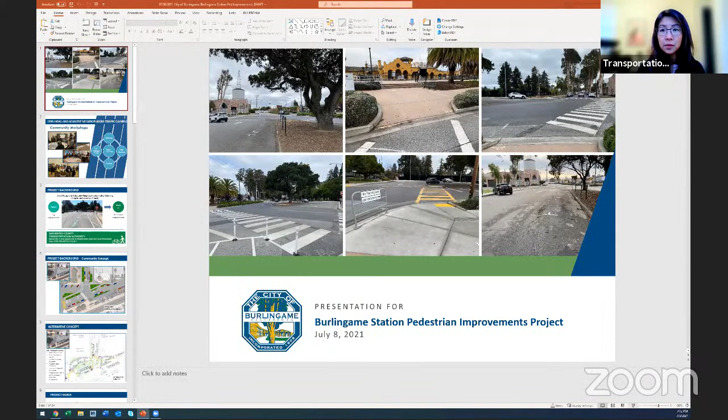Good evening, Commissioners. Thank you for the opportunity for us to provide you with an update on the Burlingame Station Pedestrian Improvements Project. With me this evening to present tonight's update are consultants Michael Fisher and Stephen Tougmasian from CSG, an engineering firm helping with the design phase of this project.

The intent of tonight's presentation is to obtain feedback from TSPC on the proposed design. While I'll briefly go over the project background, Michael will discuss in more detail the proposed design. The Burlingame Station Pedestrian Improvement Project is located at the intersection of Burlingame Avenue and East Lane, adjacent to the east side of the Burlingame Caltrain station next to Washington Park and the tennis courts. Next slide.

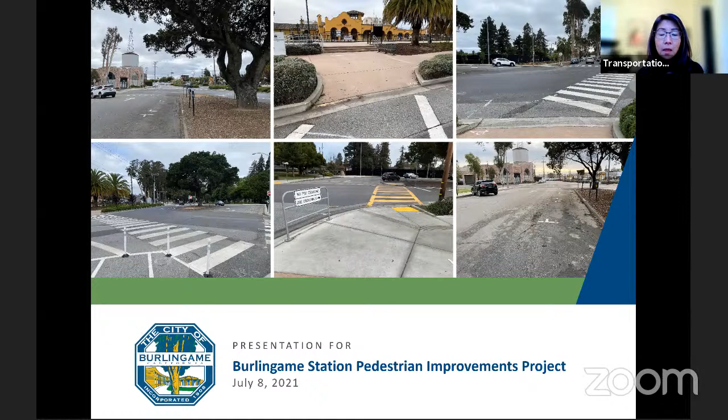Starting in 2018, staff conducted a series of community workshops and online surveys with residents from the Lyon-Hoag and adjacent neighborhoods to discuss concerns of speeding, cut-through traffic, visibility, and parking in the area, and to develop recommendations for improvement to address these concerns. Through this process, the intersection of Burlingame Avenue and East Lane was identified as one of the locations of concern. The results of this extensive community involvement was the development of the Lyon-Hoag and adjacent neighborhood traffic calming studies and recommendations report. Next slide.

The report categorized improvements based on their complexity and deliverability into 3 phases. As part of the recently completed phase 1 of improvements, the city installed quick build trial features, such as the temporary curb extension at this location, aimed to reduce the crossing distance of the long crosswalk and to better align vehicle path of travel. Construction of permanent treatments was planned for phase 3.

However, thanks to the San Mateo County Transportation Authority Measure A and W pedestrian and bicycle program, the city was approved to receive $600,000 of grant funding, allowing us to advance the implementation of permanent improvements sooner than planned. Next slide.

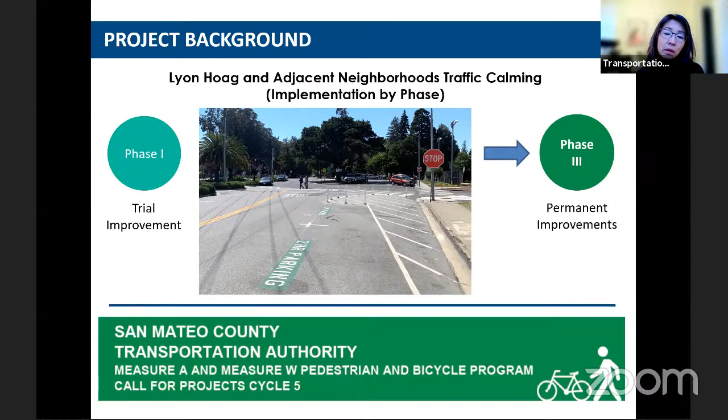With this grant opportunity, staff and CSG began reviewing the preliminary concept that was developed as part of the traffic calming study report. Some of the key takeaways from this concept include the goal of better aligning the roadway, reducing crossing distance, improving visibility, adding more sidewalks, and providing traffic calming in the area.

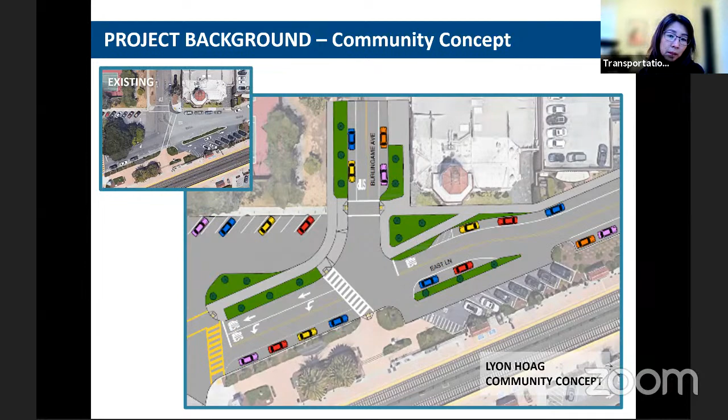Next slide, please. In addition, staff received an alternative concept from community members. Key takeaway goals from this concept include preservation of the heritage oak tree and addition of stormwater runoff treatment. Similar to the Lyon-Hoag community concept, it also aimed to reduce crossing distance, improve visibility, and slow down traffic while creating a charming intersection.

Ultimately, staff and the design consultant felt that this alternative concept creates additional conflict points between pedestrians and vehicles, and that the one-way loop will have a learning curve for residents, as new users can often be confused about where a vehicle is supposed to travel. Additionally, funneling traffic through an area traditionally used as a parking lot may not be ideal. While this concept aims to square up the intersection, we felt that the approaches still remain pretty spread out.

Next slide. So keeping in mind the key takeaway goals from both concepts: addressing community concerns, enhancing pedestrian accessibility, creating traffic calming, preserving the heritage oak tree, and incorporating green infrastructure, staff and CSG have developed a proposed design, which now I will let Mr. Michael Fisher from CSG present.

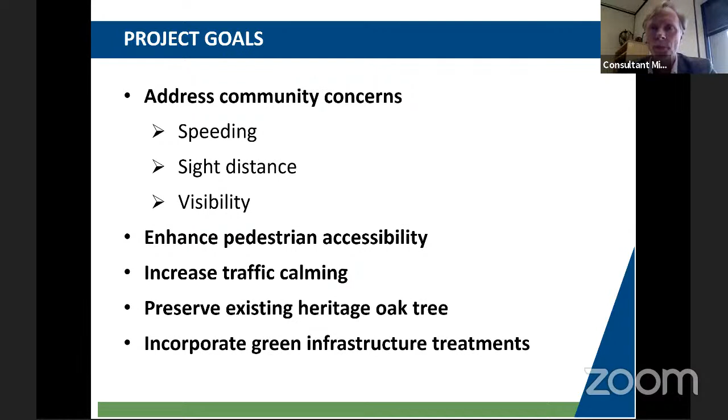Thank you. Can you hear me okay? Next slide. So here's the existing aerial, prior to some of the striping improvements shown in one of the photos previously, but nonetheless you can get a really good feel just from looking at the aerial. If you look to the right, you'll see the East Lane and Burlingame Avenue intersection is really quite a large swath of asphalt pavement with no clear delineation of where cars go. The next thing you'll see to the right through the intersection is quite a long and diagonal crosswalk.

And then if you move to the left to the center of the image, you'll see a nice green spot. That's the heritage oak tree, so we definitely want to preserve that. It's quite a beautiful tree.

Moving to the other side of the tree, you'll see the entrance to the parking lot. If you imagine yourself a vehicle entering that parking lot and wrapping your car around the tree, the exit is basically just dead center of that large swath of pavement, which can create confusion about where exactly the vehicle path of travel should be. Where's the delineated vehicle drive lane?

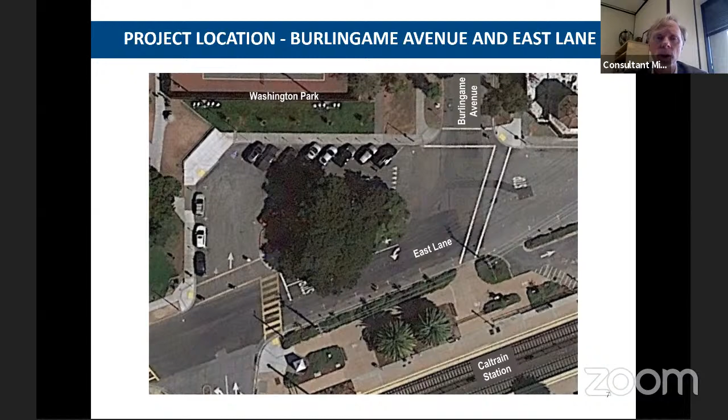So with that said, next slide. With these four things in mind, and of course everything that came before in this slide, all the background of the Lyon Hoag study in the neighborhood, in general we've come up with 3 categories of goals.

The first goal is pedestrian accessibility. Please note in these photos, in the left photo there's no sidewalks adjacent to the tree. In the right image, there's quite long crosswalks and diagonal through the intersection. So in essence, for a pedestrian to get from the west side of this intersection to the east side, it's quite a long detour around the oak tree. There's no really direct path of travel.

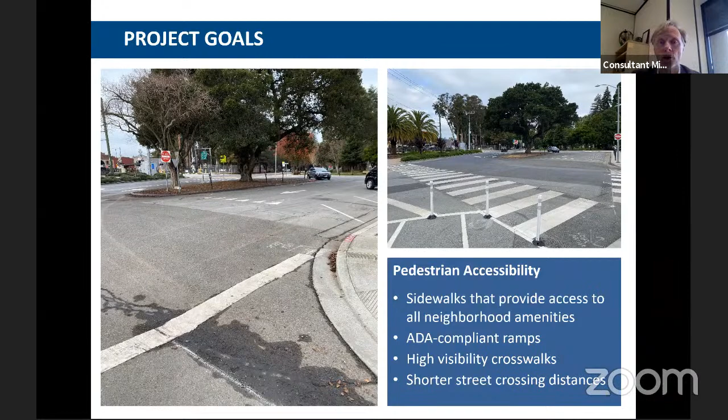Additionally, under this pedestrian accessibility goal, we want ADA compliant ramps. We're considering high visibility crosswalks, and we definitely want to shorten up those street crossings. Next slide.

The second goal is traffic calming. We really want to delineate the vehicle path of travel, making it very clear where it can be somewhat ambiguous today. We want to improve sight distance, eliminate and reduce vehicle-pedestrian conflict zones, and as Alicia mentioned earlier, address any concerns of high speeds. Next slide.

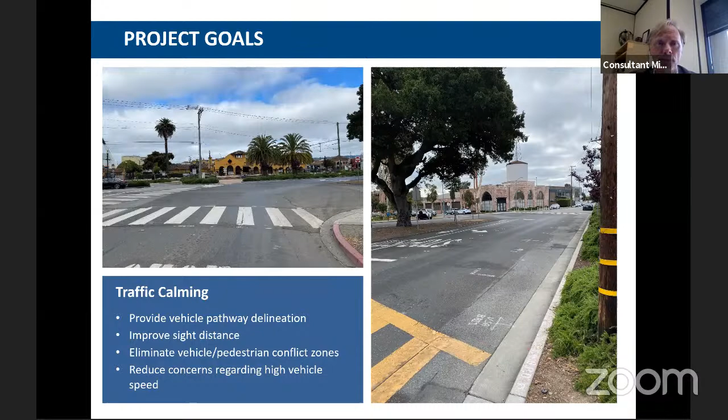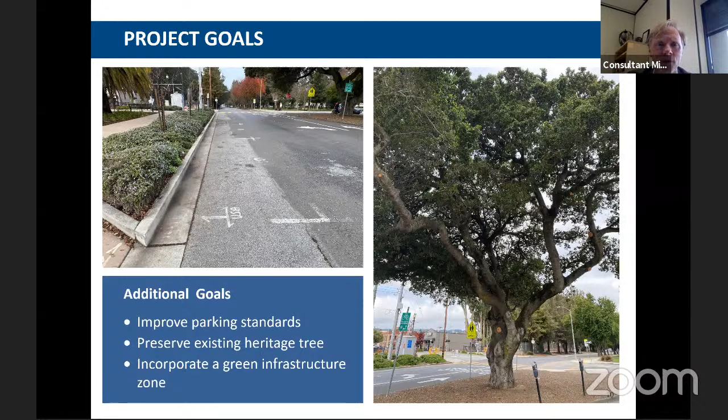The third category we categorize into additional goals, and that'll include things like preserving the beautiful oak tree, incorporating green infrastructure, and improving parking standards. Next slide.

So here's our proposed design that we've come up with, considering the community study with Lyon Hoag and the existing conditions. The green lines would be proposed new face of curb and gutter. The new sidewalks are delineated and shadowed in gray. The white striping you see in this image and the yellow crosswalks, that's all new and proposed striping, whereas the existing striping is screened back.

The green dotted area, that's potential landscaped area. You can see that surrounding the oak tree and also at the exit to the parking lot. And then the purple dotted area, that's the proposed green infrastructure, which would be water quality measures.

With that said, why don't we cycle through this, and I'll go through some of the details of the proposed project. As stated, traffic calming is a key goal. If you look at these two intersections, we've really kind of squared up the intersections. You see how we brought Burlingame Avenue to kind of a 90-degree angle to East Lane. That has sight distance benefits.

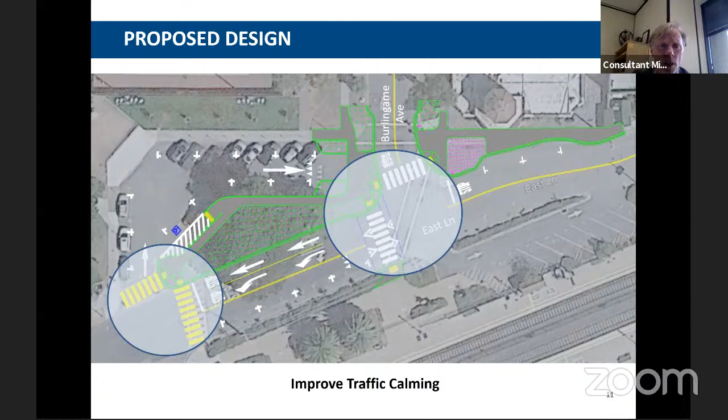The new pedestrian facilities include a brand new sidewalk, basically. Today, pedestrians actually mimic this path quite closely, but there's no formal ADA compliant facilities for that, so essentially they're walking through the parking lot. This will be a big enhancement to the area. Next slide.

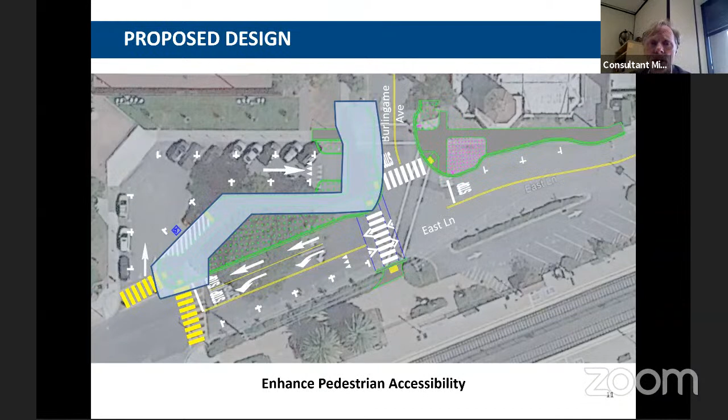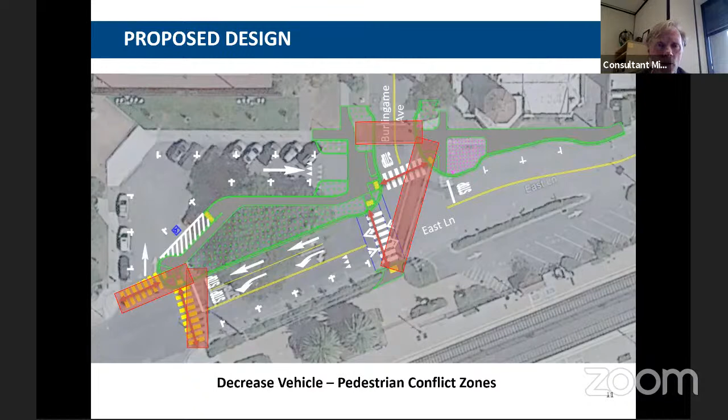This slide hones in on the crosswalks and the pedestrian conflict zones with vehicles. The red rectangles represent the existing crosswalks, and you can see some of them are quite long. The red double-sided arrows are the new and proposed crosswalks. There's still pedestrian conflict zones with vehicles, but they're much shorter and more direct, and the hope is that cars will be driving much slower leading up to those crossings. So I think we can go to the next slide.

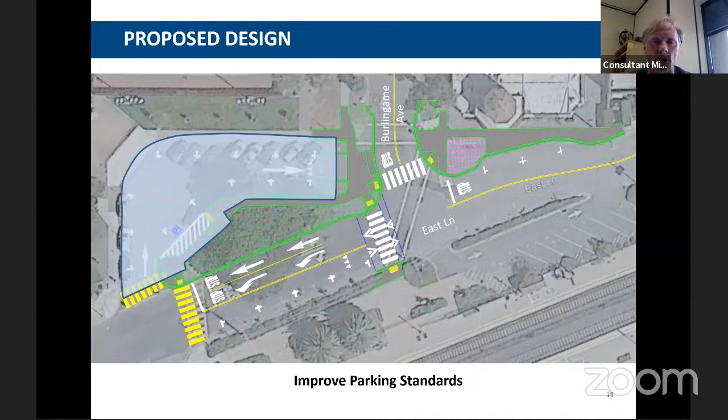So this brings us to parking improvements. We'll discuss this a little more in detail, but you can see that the parking lot has the flow and the number of parking spaces that we're going to consider when we hone in on those, with some alternative thoughts on the parking. Next slide.

Right, so now we're going to go into some pros and cons, some advantages of the proposed design. The first advantage is the circulation is similar to the existing conditions, the flow of traffic, the intersections.

One of the key things we've done with the parking lot near the circle, the exit of that parking lot is a key design consideration here. You can see how we really pulled it away from the intersection as best we could.

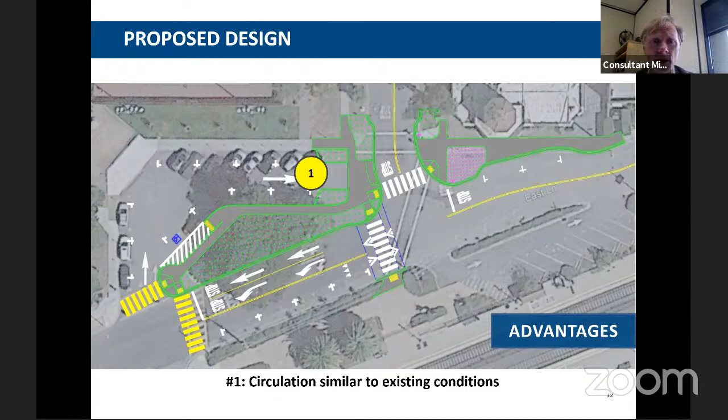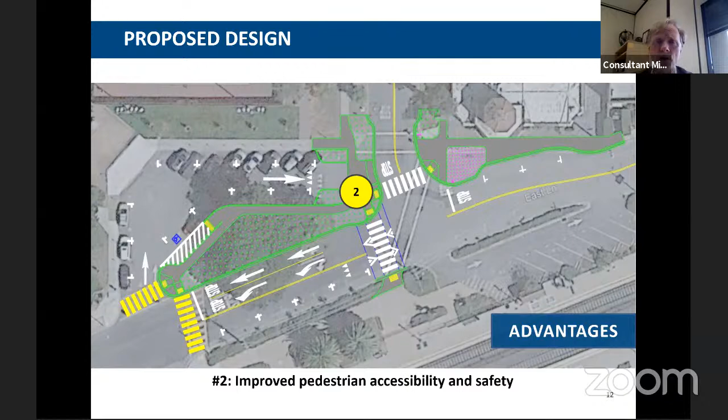Improved pedestrian accessibility and safety. This is definitely one of the key advantages and goals of this project.

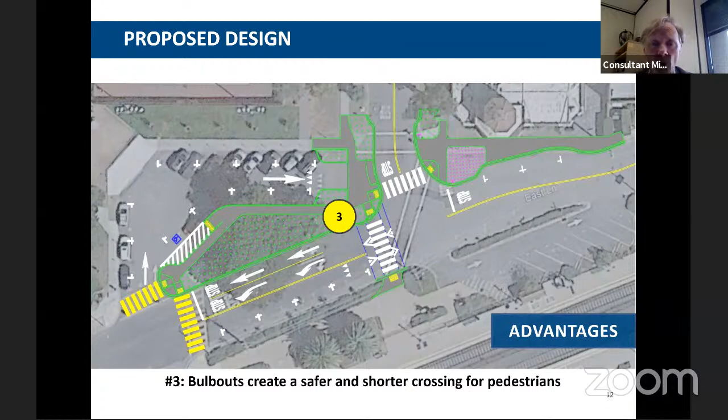As I mentioned earlier, the bulb-outs do create a much safer and shorter crossing distance for the pedestrians.

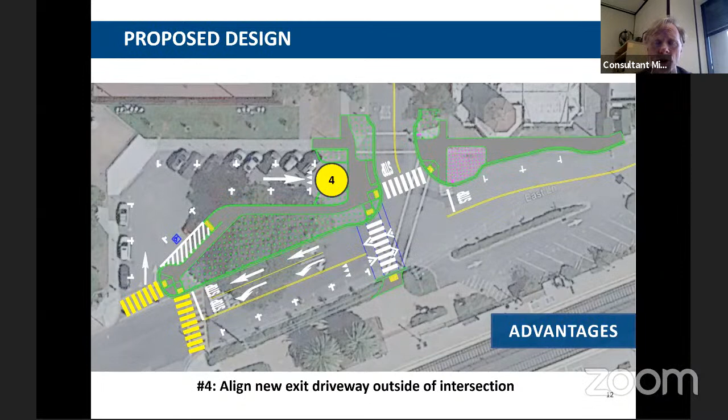This is where I was speaking to earlier. Number 4 is really key, because if you recall when I was introducing the existing condition, the parking lot really does empty right into the middle of that intersection. This helps us square it up, gives a distinct exit to the parking lot, and reduces a lot of the conflict zones with vehicles exiting, giving them a clear pathway.

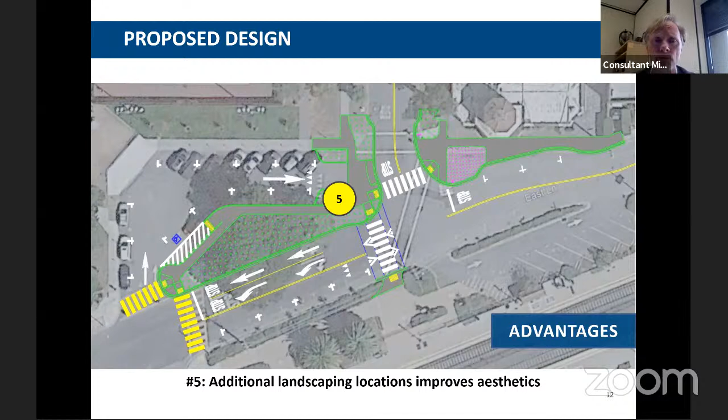Additional landscape locations, the green dotted areas, are for potential improvements to aesthetics. I understand the recently improved landscapes just to the east of this project have been well received by the community, so there's potential to consider that.

Again, I've really driven home the theme of squaring up the intersection, because that has so many benefits. We probably should give you a percentage of asphalt reduction in that intersection, but we really are taking quite a large swath of asphalt pavement and reducing it substantially.

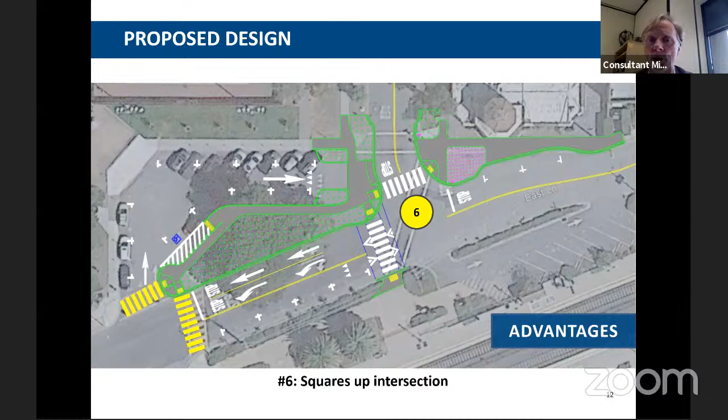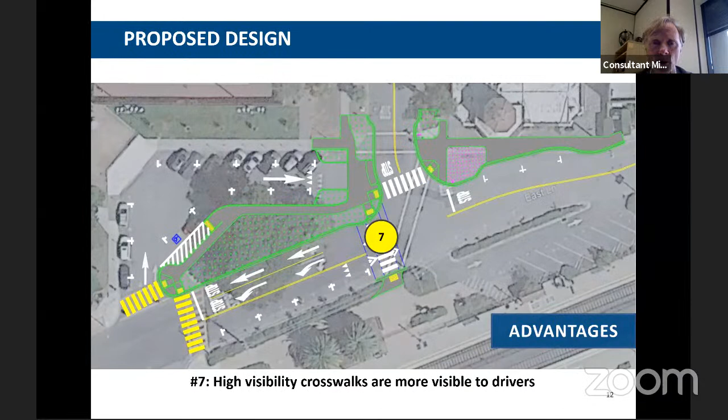High visibility crosswalks, and in conjunction with that, a raised crosswalk, which can both raise awareness of pedestrian crossings and give the car a sense that this facility is not just for cars, that it's shared with others. The intent is definitely to raise visibility and get the speeds down.

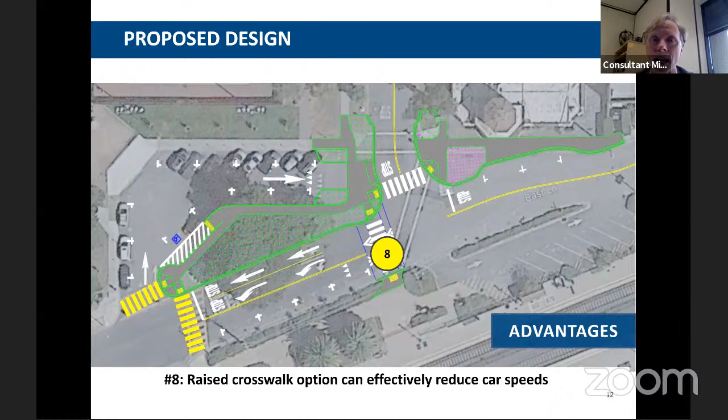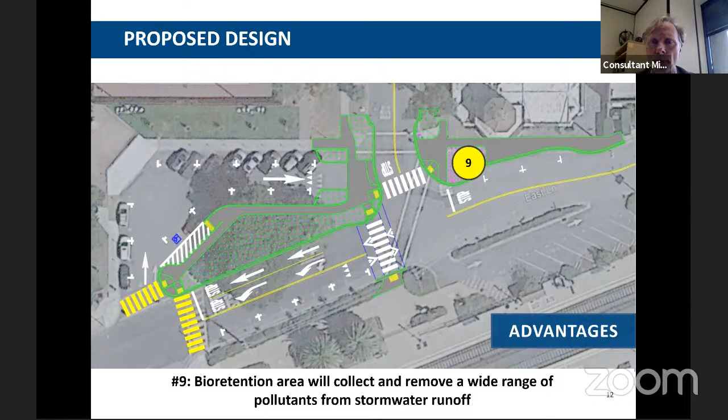This is the bioretention area, a key new feature of this design.

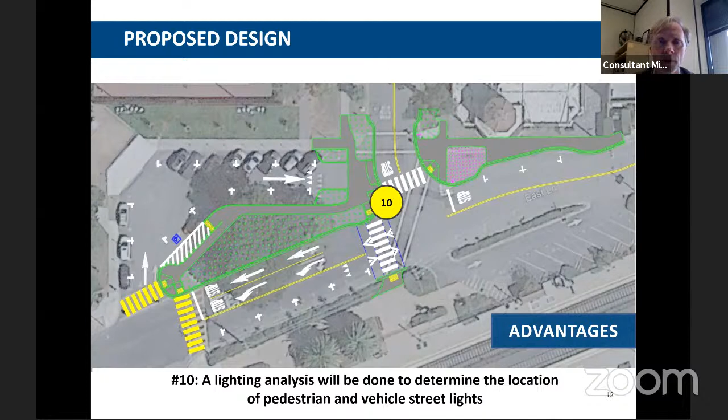This project will also include a lighting analysis. We definitely want to adhere to standard crosswalk illumination standards, and also consider both vehicle and pedestrian level lighting.

This project would entail, as one of the construction elements, relocating those meters.

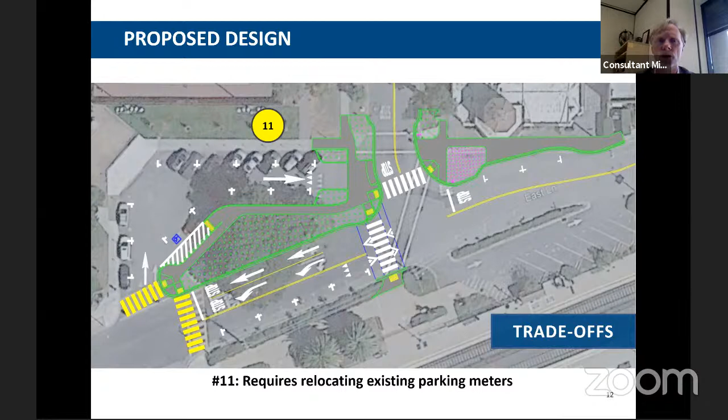As I'll speak to in an upcoming slide, this proposed design does result in losing a few parking stalls.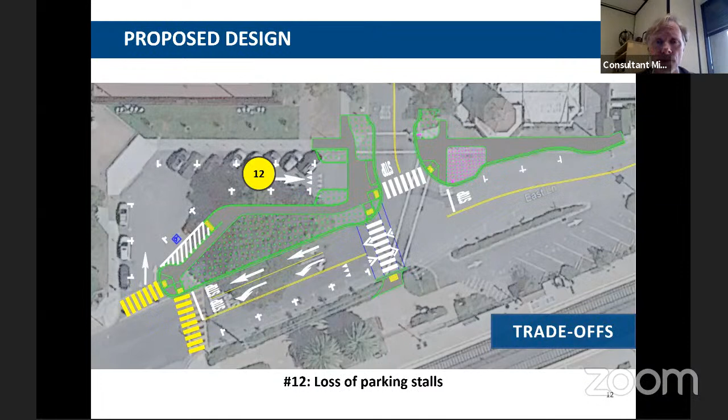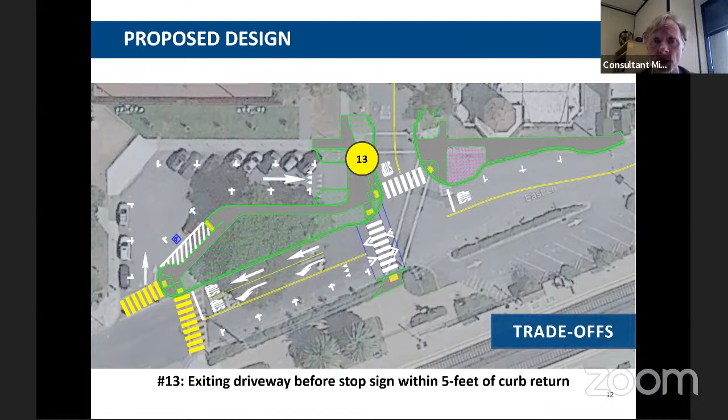Again, that exit driveway, we did our best to separate the driveway exit from the intersection flow, but it's still quite close to the curb return. I believe it's just slightly within the 5-foot rule of separation from that curb return.

So here's where I can get into a little more of the parking lot design. We've come up with two sub-options, option A and option B. Option A, above, you can see we're relying a lot on parallel parking.

Just to drive home the main design elements here: parking standards, widths and lengths of a parking stall, number of parking stalls, the flow of traffic, and the key element of the exit point of that parking lot. Considering all that, at the bottom of the page you can see the current parking is about 16 parking stalls. Option A has 10, option B has 13, so right in the middle there.

Option A, you can see, for flow and exit, is a little bit smoother. Option B, we try to add a couple, 3 more stalls. However, if you notice at the exit of the parking lot, there's a little zigzag between the drive aisle and the exit driveway. So that's the main disadvantage there, or compromise.

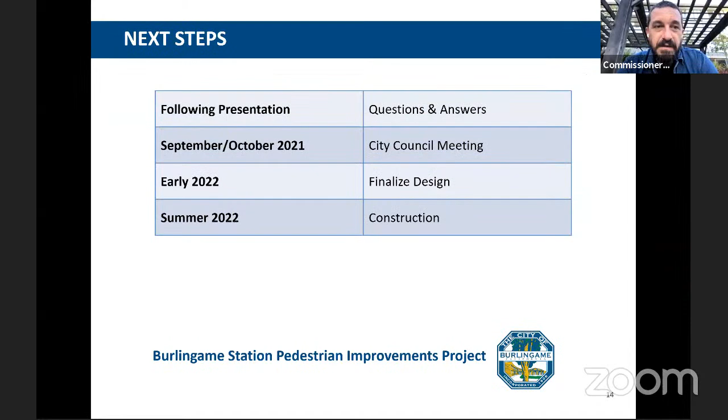Okay, thank you, Chair. Could we go back to the overhead view of the new plan, please? There we go. Okay, so I only have a few questions, maybe 3 or 4. On this parking lane, was there any consideration given? I discovered just earlier today that there's going to be a lot of additional parking becoming available with the new community center opening. So was there any consideration given to just eliminating this parking area, this parking lane, and extending the park out? Through the chair, that's the one question. Okay, continue. We'll capture all your questions and try to address it. Okay, wonderful, thanks.

And then again, about this parking lane at the exit, would that need to be a right turn only? Because a car making a left turn there would have to look back over their right shoulder to see the cars coming with no stop sign from East Lane and making the left turn onto Burlingame Avenue. So I was wondering if there's a turn restriction there so that it's a right turn only. And then my other question was, I believe that's going to be a raised driveway right there exiting the parking lane, so my question is, would there be a marked crosswalk there? There's not one in this draft.

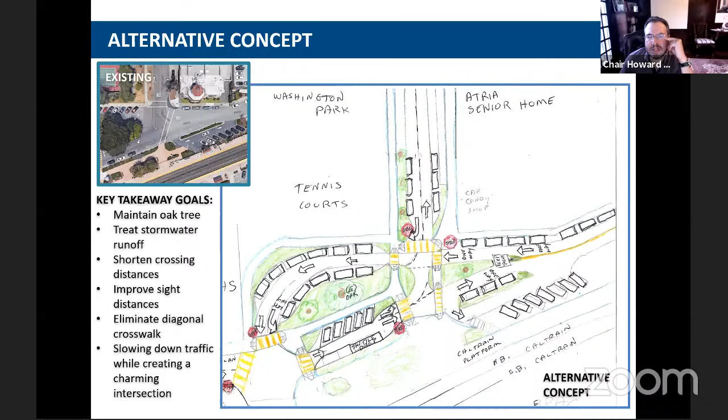Hi, thank you Chair, I had a few comments also. If we could hold it - I'm sorry Commissioner Lee, if we can limit it to clarifying questions, everybody's going to have unlimited opportunity to come back with comments. Thank you, thanks.

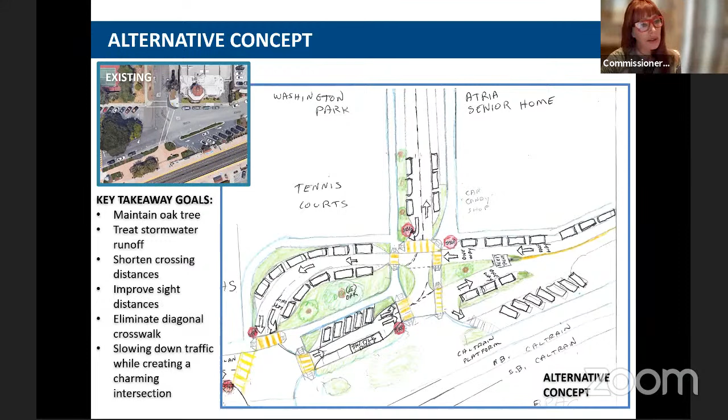So, clarifying question: did the study look at - the goal of this was to improve pedestrian safety and accessibility, if I recall. That was goal number 2. What we're doing is trading one crosswalk for another crossing.

What is that, East Lane? I propose that we design in the third crossing again, so pedestrians can cross in any direction that they choose, yes, where that stop line is. We still need a crosswalk going from the candy store corner over to Caltrain. And did they look at widening this long strip of park planted area along southbound East Lane, making it wide enough so you could land a crosswalk there?

That's one question. The other thing I see is the issue of queuing of motor vehicles crossing the train tracks, which is a big issue for our designers. So I'm hoping the consultants look at making northbound East Lane only one lane, eliminating that left turn lane from northbound traffic. Did they consider making the left turn lane for the southbound traffic instead, giving more room for queuing of southbound traffic? That would enable us to put in a stop sign at the crosswalk that's desperately needed by pedestrians. This is a pedestrian project, not a motor vehicle project - it's for pedestrians, number one. So I'd like to find out if the consultants looked at the queuing, if a left turn lane was added, eliminating the northbound one and making it southbound, then we could add a stop sign.

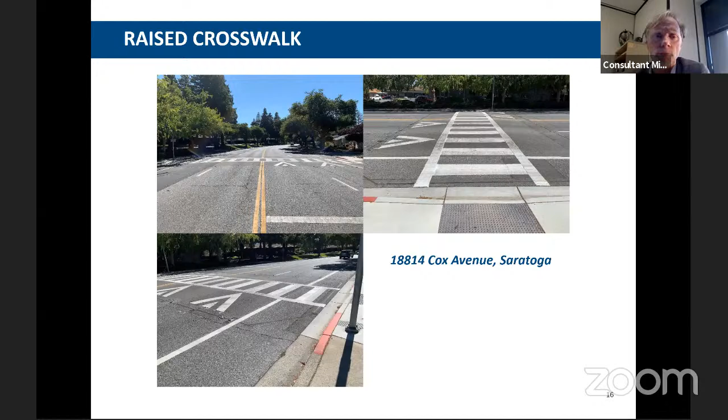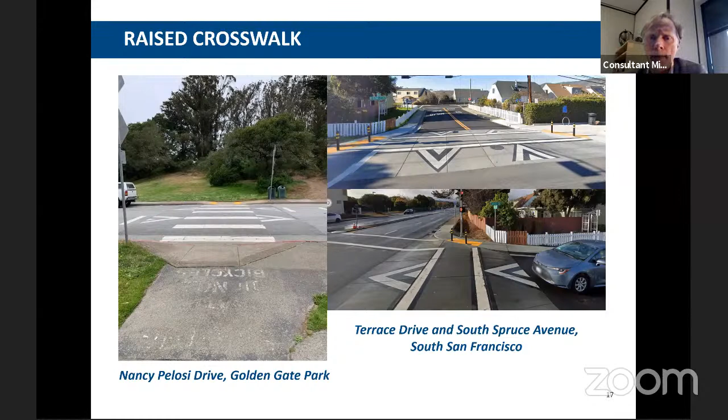And if I may, Michael, I think we have some examples of how a raised crosswalk looks like in a bioretention area. Typically they're about 3 to 4 inches in height. These are some existing cases around the area, in San Francisco and South San Francisco. It's kind of a typical bioretention area.

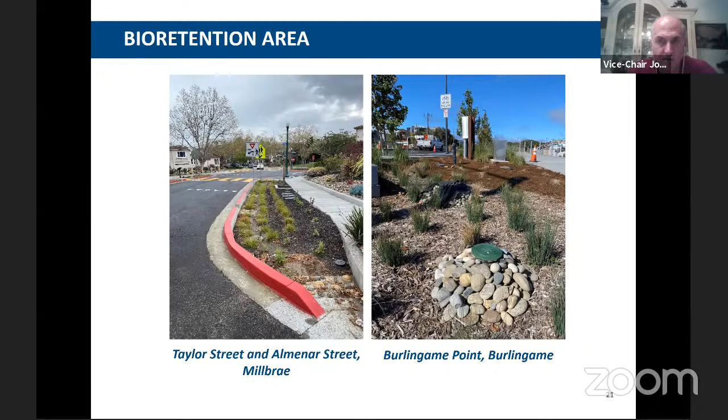Just one follow-up question on the bioretention area location. Is that an area that typically in the wintertime gathers a lot of water? It would be designed to percolate.

Generally speaking, this is Steven, working with Michael. East Lane does have a slight crown down towards the bioretention area, and portions of East Lane actually drain towards it as well. There are also some roof drains that come off of these properties that drain to it. So this is actually a fairly ideal spot to put the bioretention area. It'll collect stormwater runoff from the roadway, and the oils and grease won't be able to get into the system—not 100%, but the intent is that the oils, the grease, all that gets separated out in the stormwater bioretention area, so it doesn't end up going into the storm drain system and out to the bay, polluting it.

Okay, thank you. I have no further questions.

Thanks, Commissioner Martos, I have just two questions. The first is just to clarify—I've heard mentioned a couple times that we're going to get 80 new spaces in connection with the community center. Do you mind clarifying how many of those spaces are net new? Because I think there are some spaces coming out, so it's helpful to know how this compares to the status quo ante, what the net new spaces is.

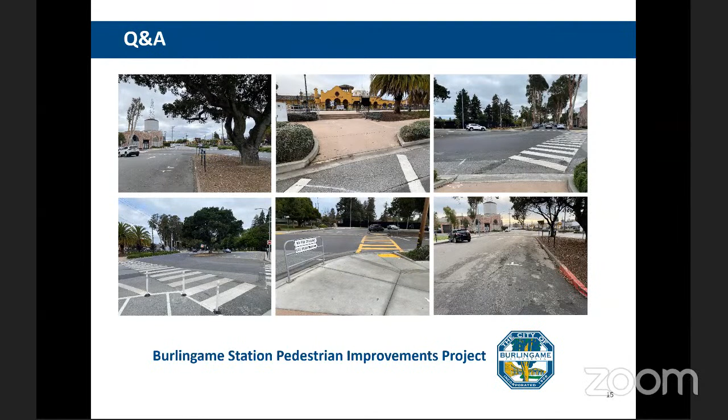We like the design that we see, particularly the north end of the design, and we saw a lot of opportunity to reduce asphalt, as you might say, on the southern end by building out that area south of Burlingame Avenue. We do feel strongly that there needs to be a third crossing across East Lane at the southern end of that intersection, for a number of reasons.

Basically, we know people are going to jaywalk if we don't put a crossing in there. And we also know that people are going to be at times in a hurry, so they're going to catch a train. What we don't want to do is create a situation where they have to go out of their way or dash across some place where cars don't think that they're meant to be.

So we would support the addition of a third crosswalk, and we would support building out more greenery, widening that little green strip that looks like a baguette. We think there's a real opportunity to widen that and make it a pedestrian landing zone, and make it a safer crossing. So the net message here is good direction, and let's do more of taking out that sort of amorphous asphalt intersection.

The second thing is we felt really concerned about there being no stop sign for that white crosswalk across East Lane. The cars going down that will not have a stop sign there will also not have had to stop at the previous intersection. It's concerning to think that they may have built up considerable speed or be maintaining a higher speed. We want to make sure they have some way of being forced to slow down, particularly if pedestrians are expecting a safer environment. We had a bunch of other smaller comments that have already been relayed by some of the commissioners who were at the BPAC meeting, so I'll pause there. Thank you.

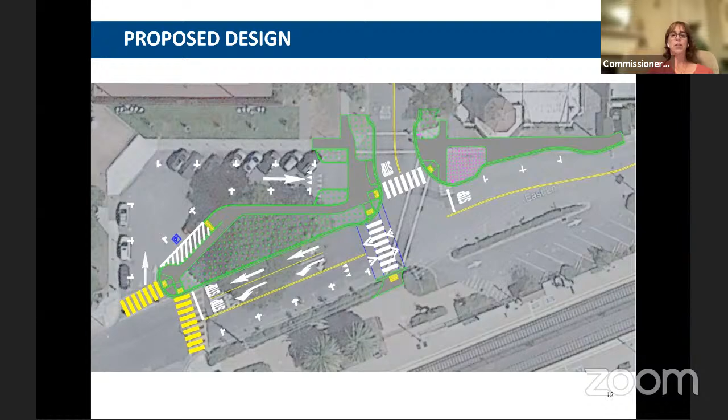So I think that would be really dangerous. But I think we've passed that point. I just wanted to make sure that I did mention my concerns. So I like parking lot A, and overall I think this is going to be so much more safe and better looking. I'm very excited that we're doing this. Thank you.

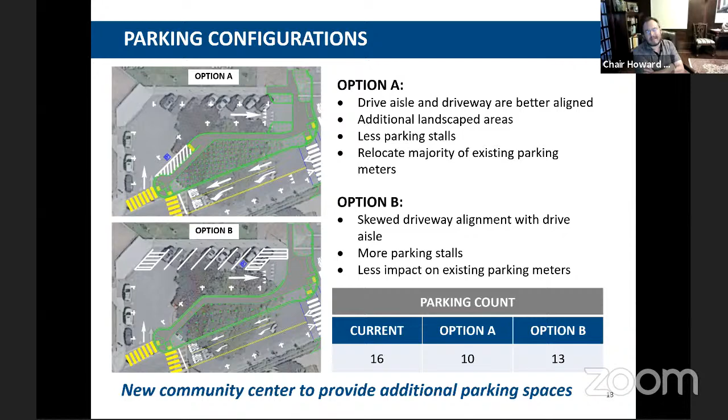I think first I do want to address this third crosswalk issue, because if I understand it as proposed - and we may not be looking at the best picture - the odd thing about a third crosswalk as proposed is it seems like it would take the pedestrian right into the Caltrain parking lot there, which is not how it is today.

And I think that's why I was suggesting maybe if you really felt there needed to be a third crossing, you'd put it at the other end. I would rather do it mid-block than right in the intersection where you're taking people into the parking lot there.

It's just, I know the idea is you'd expand the median, but people still need to get from the median to the curb. And I heard it said earlier, the distance from the corner to the landing point from the old crosswalk as compared to the new set of crosswalks really isn't different, and you have a landing.

So I don't feel as strongly about the third crosswalk at the end of the day as I've heard from others. But more importantly, I'm not sure how it would work in a way that is really safe and not landing people in the middle of a parking lot.

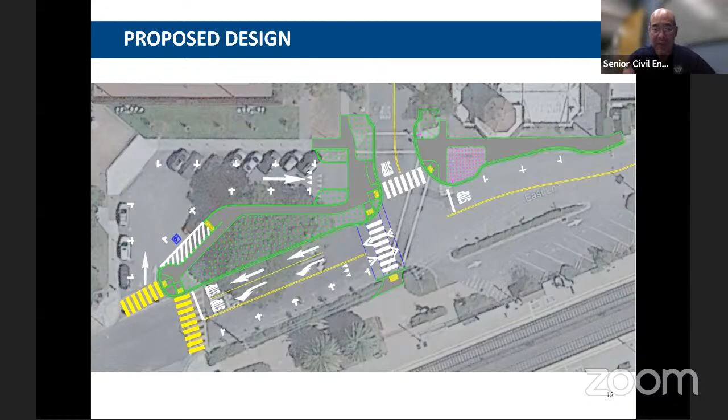This is primarily an update, and for the parking, we'll take a look at some of the things discussed tonight, whether pushing it out or trying to put the ADA space in a different location to see how that pans out. The basic design of the intersection doesn't change, it's tweaking the parking lot. I'll check with Michael and Stephen, but I think that's something we can work through. We want to show you what's going on and our direction, how we got to where we got to.

I'd like to make one other point about the ADA space. I'm not disabled, but I've been on crutches for several months in the past couple of years, so I do know a little bit what it's like when you're not walking at full capacity.

I've never had the benefit of parking in an ADA space, but if I were on crutches again, I'd far rather be in the space next to this sidewalk and the tennis courts than off in the other space, by East Lane. When you're at a disability, like when I was on crutches, 50 feet makes a difference, especially if I'm trying to get my kids to the tennis courts. Being forced to park back there isn't near anything, unless the person is going to the train, then it's an advantage.

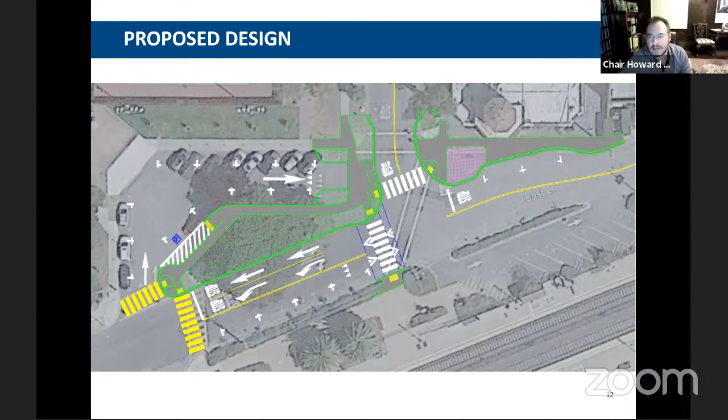Okay, thank you, Michael. Thank you, Stephen. Thank you for staying with us late into the evening and for your hard work on this. I know it took a lot of thought.

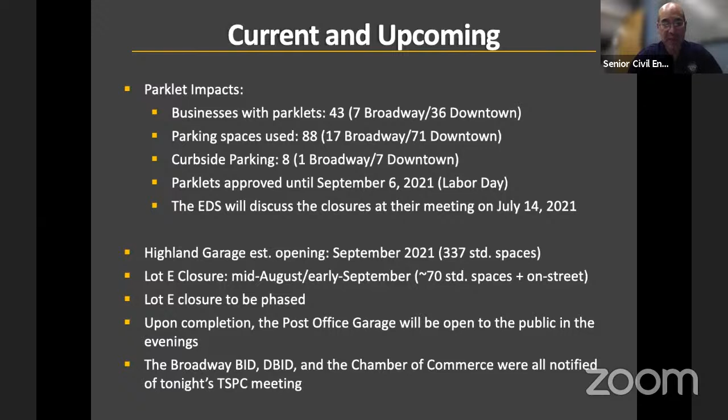And let you know, we tried to notice everyone we could in the business district. I see Mr. Kavarian is on this as well, and I did see Ms. Keller earlier. They were all noticed for tonight's meeting. So kind of give you that.

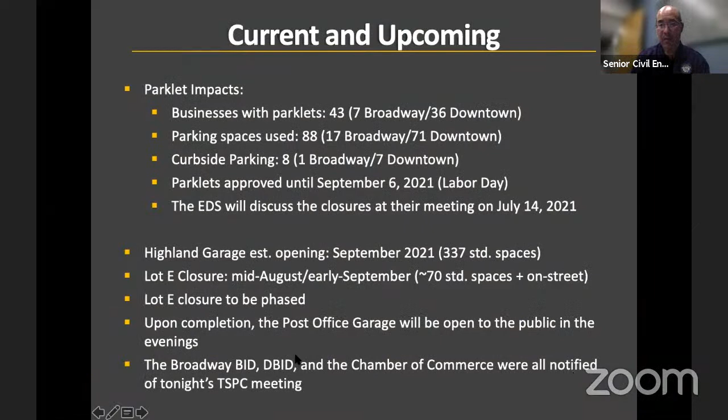Well, on this one, why don't we, especially since what's left of the members of the public have been waiting so patiently, why don't we go straight to public comment, and then I'll start running through the commissioners again.

So I see Mr. Kavarian, you got your hand up. I probably didn't need to. I figured you'd want to comment. So why don't you go ahead if it looks like you're able to talk now. So please feel free to comment.

Good evening, Mr. Chairman and members of the commission. Thank you for allowing me to speak tonight. The parklets and road closures are a dilemma for any business district.

The last 15 months, our downtown has accommodated, I believe, 7 or 8 restaurants with parklets. I'm speaking tonight as a business owner, not as the president of the Broadway BID. And as a retail business owner, I should say, things are going back to normal. Restaurants, in my opinion, are back full force, and they're hiring people, and they've been busy the last several weeks.